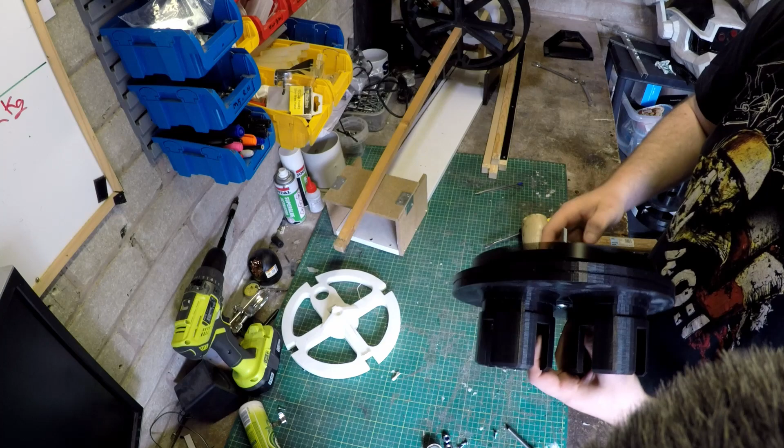So what we need to do now is get this new one back onto the frame and get it all reassembled.

Okay, so that's now reassembled and reattached. I've not attached anything permanently, such as these wooden braces. I'm not entirely sure if I'm going to keep them in their current state. I may need to do something else, or I may end up doing something else.

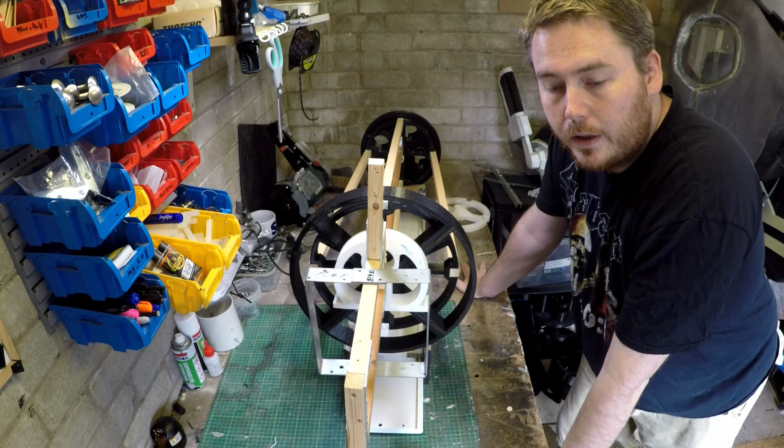Our next step, so that we can start planning out the body, is to disassemble this section here and to remove this white piece here, as I've got a replacement that needs to go on.

Okay, so that's now disassembled. Time to attach this. Now, the print did fail for this part, but we've got a very clean cut there, so I should be able to reprint this other piece and glue it straight back on. So let's get this fitted.

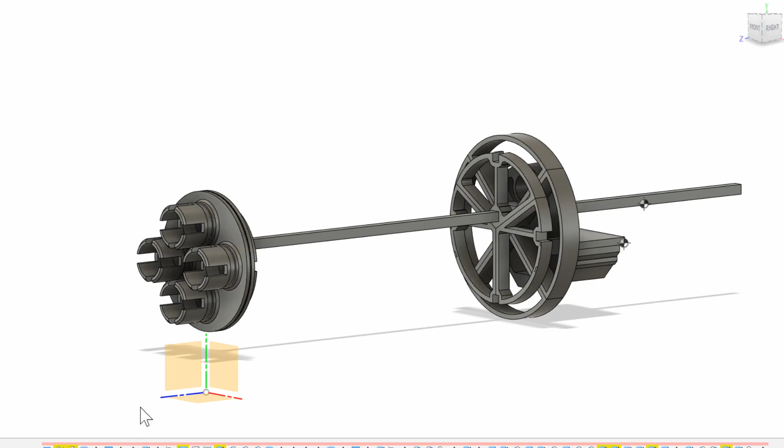So if I start to bring in the main body here and the ammo drum, we can start getting a clearer picture of how large this is going to be, how wide it is, how tall it's going to be, and what sort of detail we're going to look at.

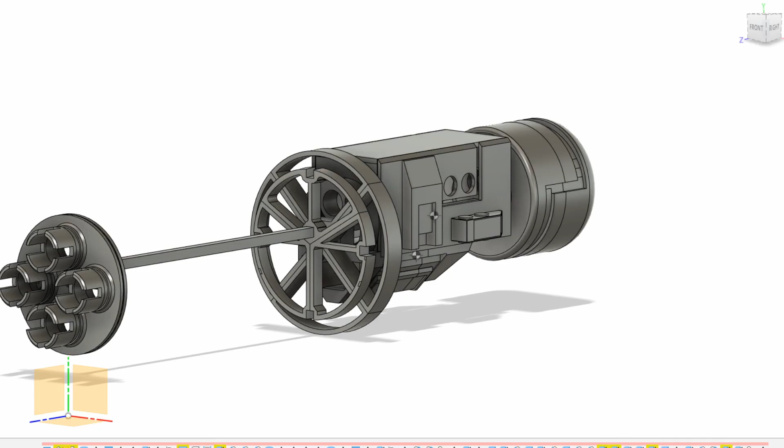Now, this is just the basic detail. I do fully intend on sticking some LED panels or maybe even some matrix displays on this to add a bit more oomph to the detail. But this gives us a baseline to work from.

So we've got this bottom section here, which I've 3D printed, purely because of the level of detail I want to achieve on it. It needs some cleaning up on the actual 3D print, but it looks pretty good.

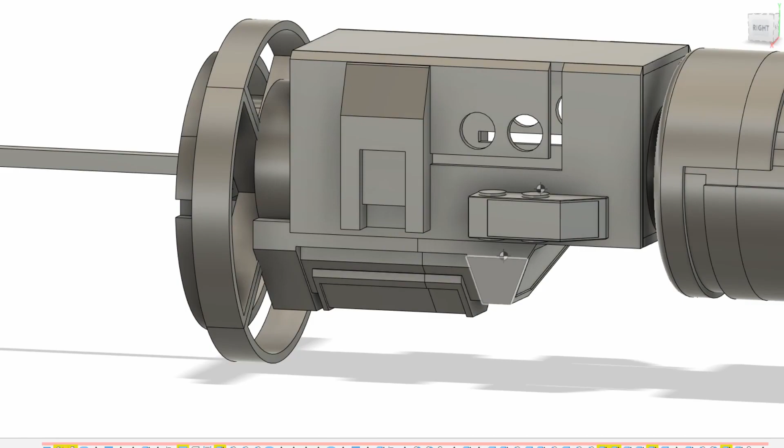We've got these side elements as well that are going to be 3D printed, so we can retain the same level of detail, but the main panels we have here are going to be either EVA foam or foam board. I'm not quite sure which we're going to do yet. It all depends what looks best.

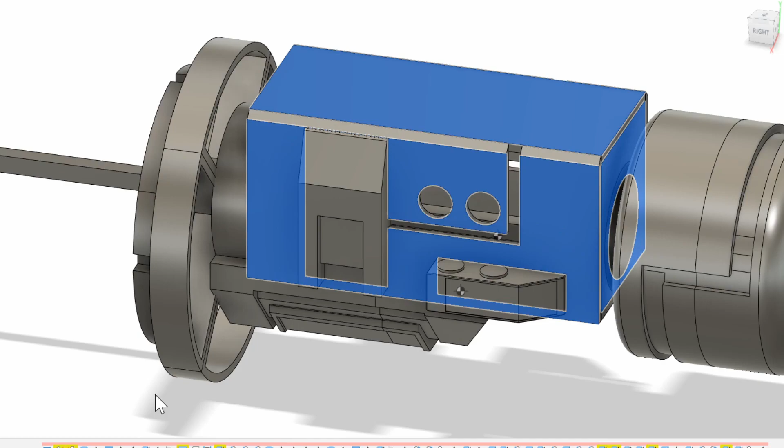Now, we do have a large space to cover with these panels, so I think what we're going to need to do is create the brackets, or brace if you will, on the inside to hold this structure.

This box together, especially since we're going to have some sections cut out.

If we use 10mm foam, I'm going to have something behind the foam to keep the strength. If we use thinner foam, say 5mm, then it's going to be a lot more flexible, but at least I'll have the double layers.

With regards to the foam board, I could have that structural integrity because it is quite stiff, but it's really lightweight. The only downside to using the foam board is the edges can be quite difficult to cover up or neaten up. That's a decision we're going to have to make when we start to actually assemble it.

First things first, though, I need to take measurements from the inside of this, and then we need to start planning out how these are going to attach to the rest of the structure.

Now, we've got one of the braces already. We need to create another one and then start to get a better idea on where things are going to sit. So I think that's going to be our next step.

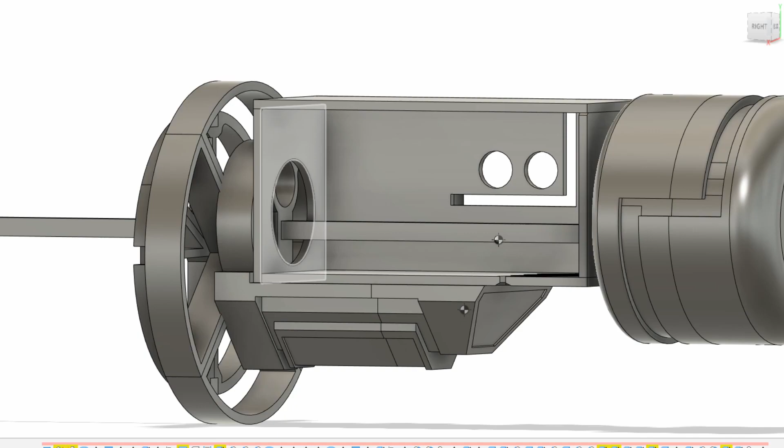The ammo drum is currently on the printer. Now, we've made this a much lighter weight, and it is mostly hollow. I've got some sections where I'm going to attach some neodymium magnets. Hopefully that'll keep it closed.

I do envision having the problem of it not lining up properly. If that's the case, then it will be quite a simple process of just having some eyelets or loops of some variety on one side.

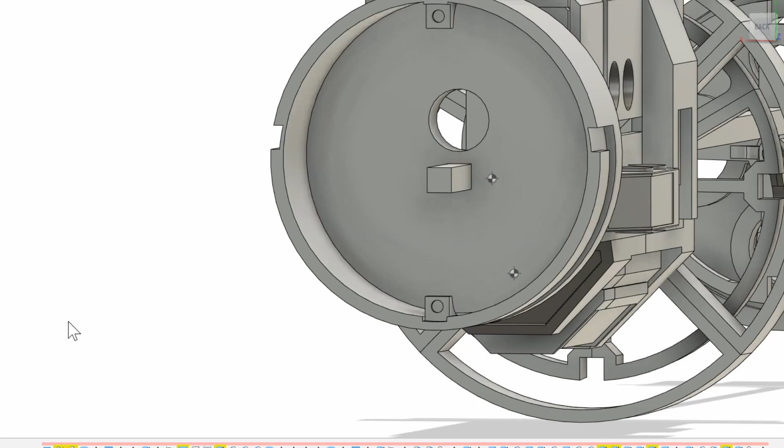And some pegs or dowel on the other, so that they actually connect together and are less likely to rotate out of place. So once they're finished printing, we can get those assembled and put onto the burst cannon.

Okay, so that's pretty much the plan. Before we do any of that, we need another one of these braces. I've got a strip of material over there. I need to measure this out to make sure I get it exactly the same, and then we can add it on and start building out the box section for the main body.

So I've just been going over what I mentioned previously about using these foam boards to build out the box section. I started using some foam that I've cut to size, like this piece here, to fit on the side.

And I really don't like how it's bending. So I thought, well, let's have a look and see what the foam board actually looks like. So I've cut some pieces to size, and to be honest, they actually look really good.

Two pieces of this foam board together comes to just around 11mm, which is pretty spot on. I was aiming for 10mm, so that's not too far off. I'm sure I will be able to come up with a way of covering the actual polystyrene.

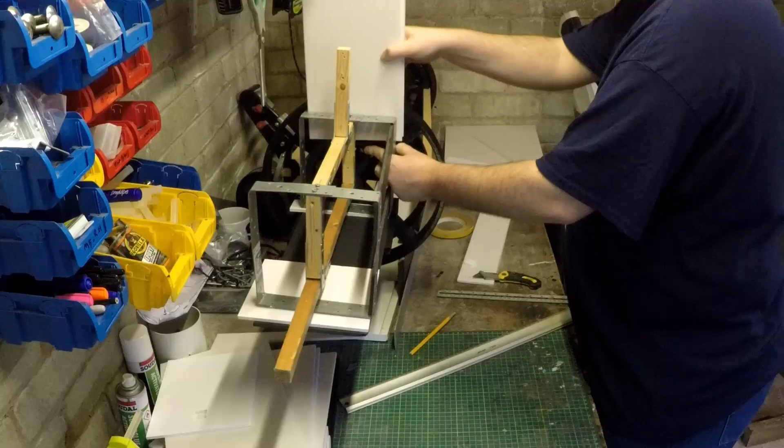So there we go, we've got the body all built. It's a bit rough at the moment - I still need to chamfer the edges, but I'll wait until next time to do that. We've got the ammo drum fitted on the back, and as I expected, it's now back heavy, which should make it really easy to pick up.

Just got my glove here for scale. I'm going to be building a new fist and lower arm to be much more accurate to the model itself, and that will hide all of this. It also means I'll have more room for the joystick I'm going to place here, and won't need to wear a glove. The advantage is I'll also be able to hide the hatch that's going to sit underneath.

I just need a small access hatch so I can get to the cables I need and disconnect them if required. I also think the batteries are going to fit in the middle here. I was originally planning on sticking them in the ammo drum at the back, but the weight of the ammo drum is high enough as it is, so I don't want to add to that. If we put the batteries in the center instead, I can seal this up and not need to worry about the magnets or anything like that.